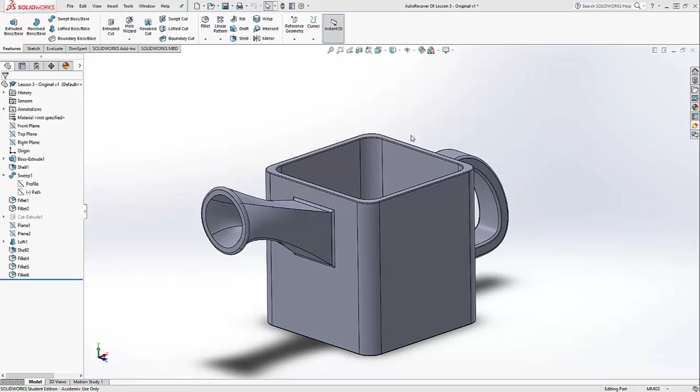Part two of lesson 3, advanced topics. So in the last part, we left off here with our watering can.

Yes, thank you for reminding me that it has not been saved in 20 minutes. We good? Did I save it?

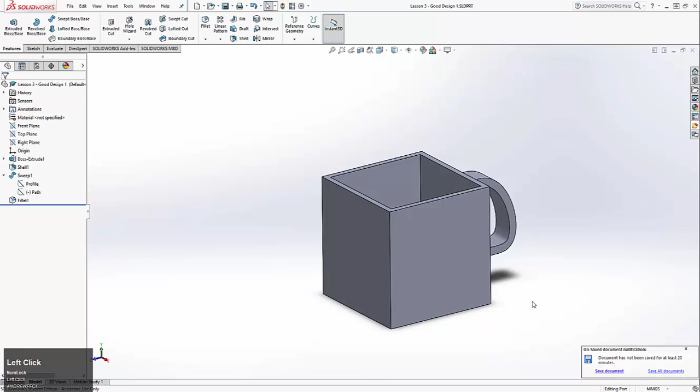Okay, I saved it. So we made our extrude and our shell, and then we made our sweep for the handle. And then in this part, we're going to create the spout and then add some fillets to make it look nice.

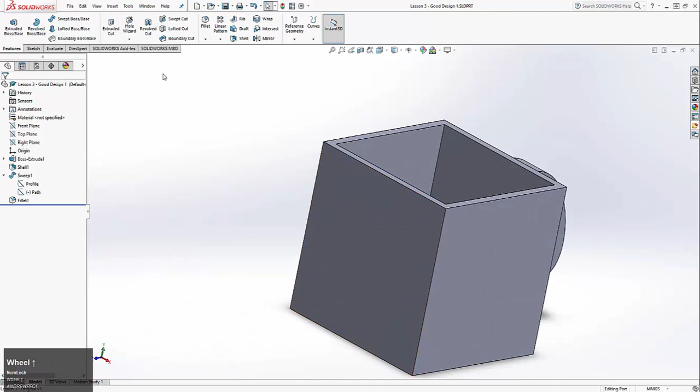So the first thing we need to do is actually we're going to put a hole right there. That's where the water is going to come out. So let's do an extrude cut on this face. Control 8 to center. Get our center rectangle. And just draw a rough square. And we'll set the size to 30 each.

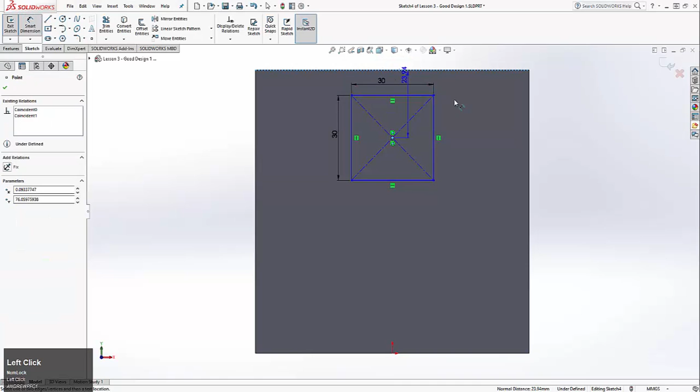We'll say that the center here is 30 from the top. And we'll say that the center is vertically aligned. Okay. So there we go. So it's cutting through. And this is a good example of when you would want to use blind, up to next, or up to surface. And I'll show you why.

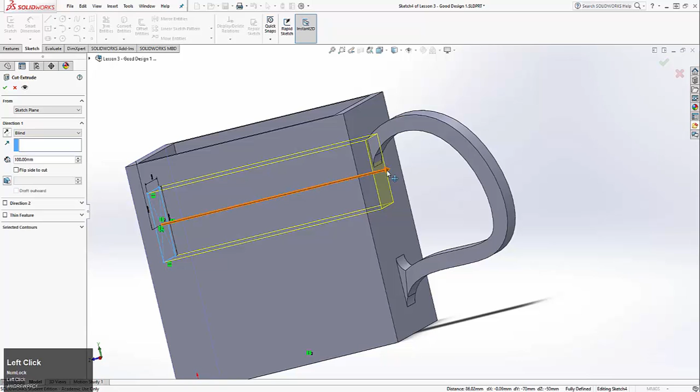So right now, with blind at 100, it's cutting through the entire flower pot. Watering can. It's a watering can. And it's starting to actually cut through the handle, which we don't want to happen. So maybe we just want this to be 5, so that could work. And then it would only go through the wall.

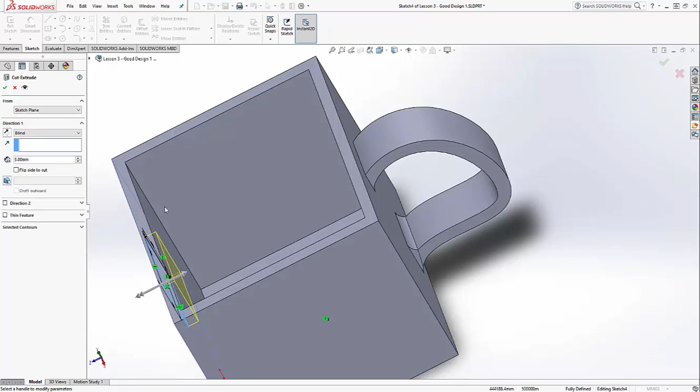But if the thickness of the wall changed, excuse me for the yawn, or maybe the wall wasn't so even, you could do either up to surface and choose the surface, or probably, I don't want to say the best because there is no best, you could do up to next.

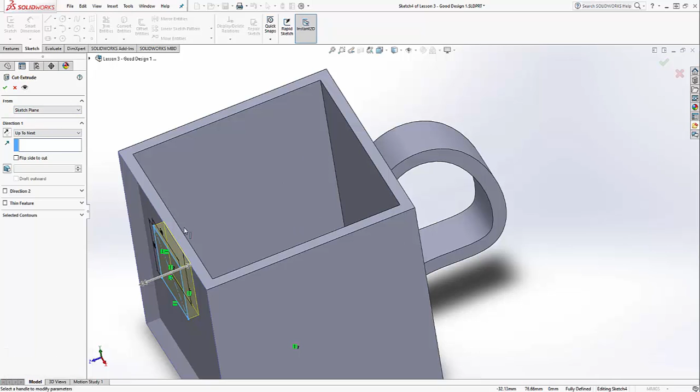So if you remember what through all does, where it goes through everything, up to next is essentially like through all, so it's going to go through all of this surface until it encounters another something, and then it's just not going to cut through that. So then you don't have to worry about how thick it is or anything about the surfaces. So I'm going to do up to next, and there's that.

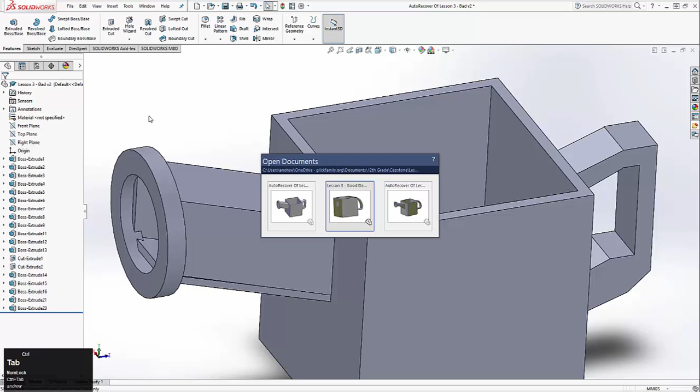So now, if we come back to our bad flower pot, which I think is this one, yes. So we had our cutout right here, and we extruded on the side, and then on this side, and then the top, and it was just very ugly. It was bad. So instead of doing that, we're going to be using the Loft tool. Where is it? There it is. Lofted boss/base right there.

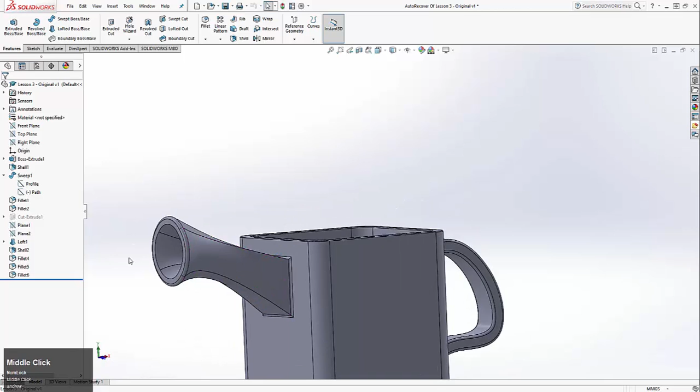Okay. And the way the Loft tool works is it takes a bunch of sketches in a tower sort of, and then it will turn those sketches into an object. So something like the spout right here. So first we need to make the sketches, and what we can do is we can go to features and then do the reference geometry, and we can make more planes. So just like we have our front, top, and right planes, we can make new ones.

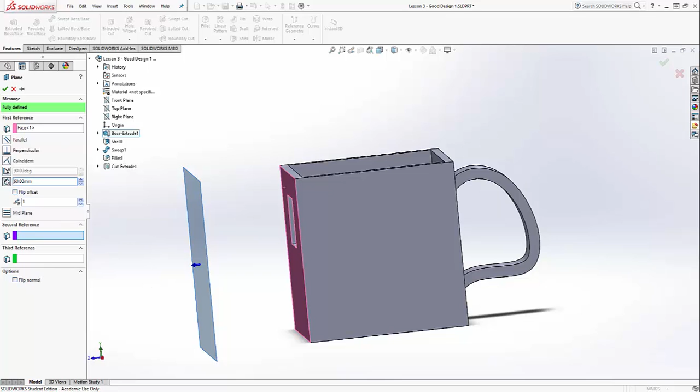So our reference for these new planes is going to be this front face, and we want this first one to be 60 away. So that's a reference. We can say parallel, perpendicular, and you can define them in a variety of ways. So say you could have a point or another object right here. You could have the plane project up to that, and so on. You could have angular offsets, but right now we just want the distance. And then we want another plane, this time 80.

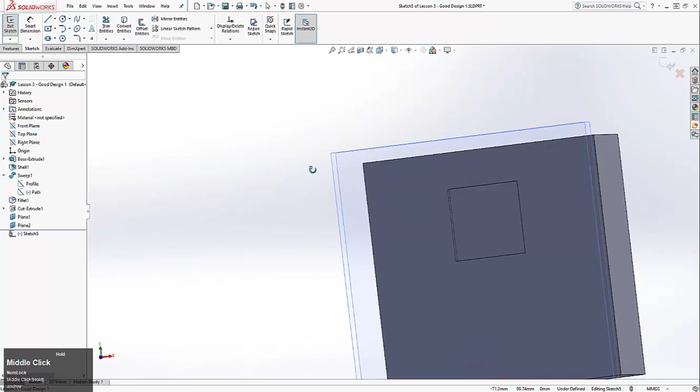Okay, so we have our planes, and now we're going to make our sketches. So I'm coming over to sketch, choose this surface. I'm going to do Control 8, and I want this square. So a couple ways you could do that is you could come over here and show the sketch, and whether or not you show the sketch from the extrude doesn't really matter. Actually, it does for what we're going to do. So for the sake of this, I'm not going to show the sketch.

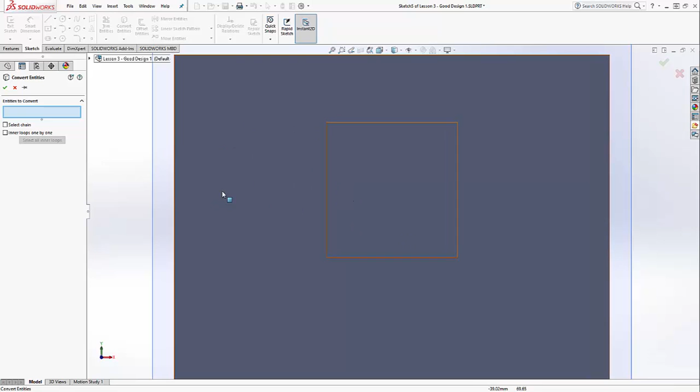So I'm going to come over here to convert entities, and this is essentially going to take things in your model and put them into your sketch. So I'm going to click on these lines right here, not the face. There we go. So now these 4 lines are in the sketch.

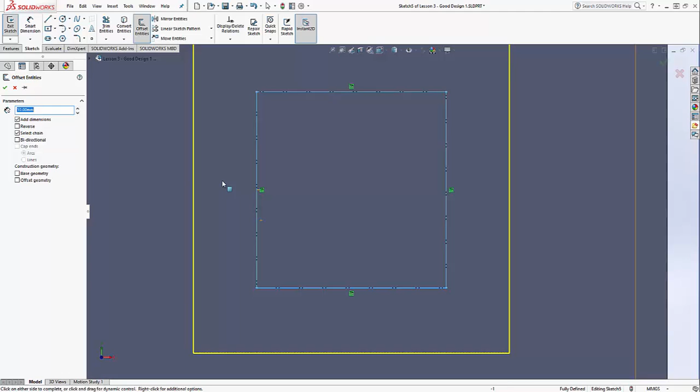I don't actually want these 4 lines because I want our sketch to have a little bit of an offset to it. So I'm going to do for construction. So I selected all of those, said that they were for construction, and then I'm going to come to offset entities, and it's going to offset them relatively simply. And I'm going to say that this is going to be 2.5 thick, and there we go. And exit sketch, and there's our first sketch done. Now for the second sketch on plane 1. Of course, you can rename them.

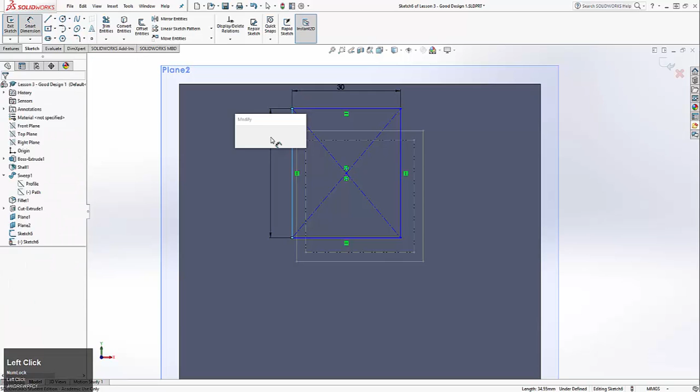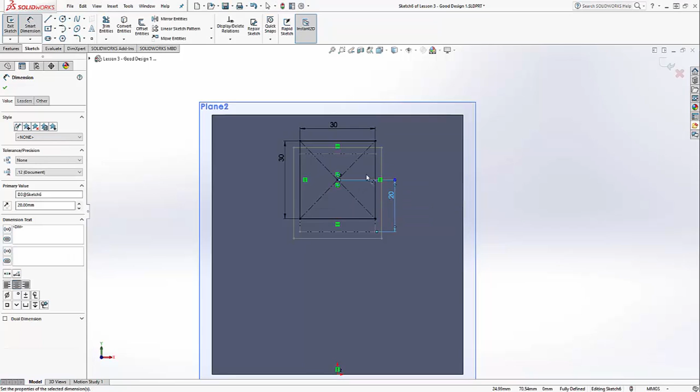So I want this one to be a square, like so. Let's say 30 and 30. So it'll come down a little bit. And then we want this to be aligned, once again, with the origin. So they are vertically aligned. And then let's say that this one has come up from the bottom. 20 seems good. Sure, let's go with 20. And there's our second sketch.

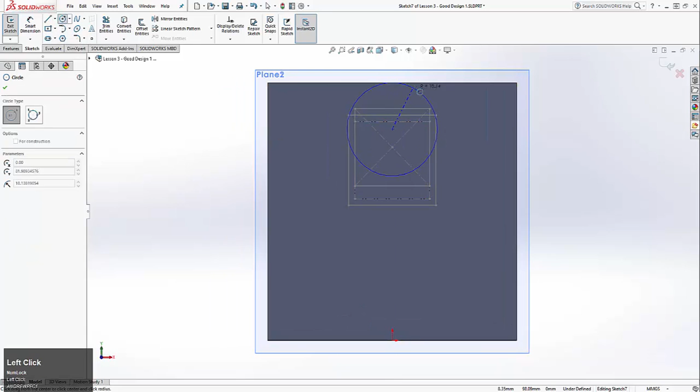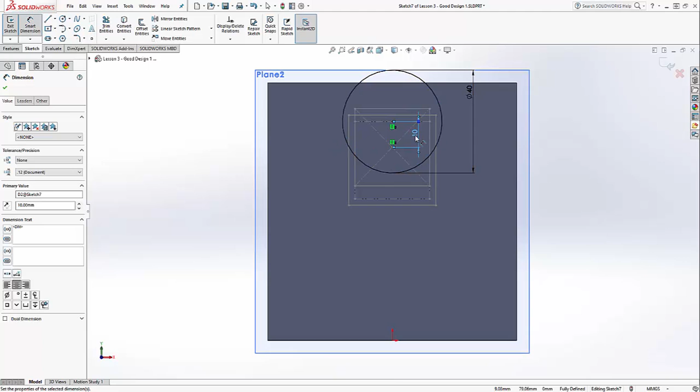And finally our third sketch. And by the way, you can scroll to go along this. I've been doing that a lot. I don't think I've mentioned it by name. Take a circle. You shall be 40 millimeters in diameter. It shall be vertically aligned with that point, and it shall be a distance of 7.5. How about 10? Too much? Let's do 5. I think 5 is a little bit better. And there is our third sketch done.

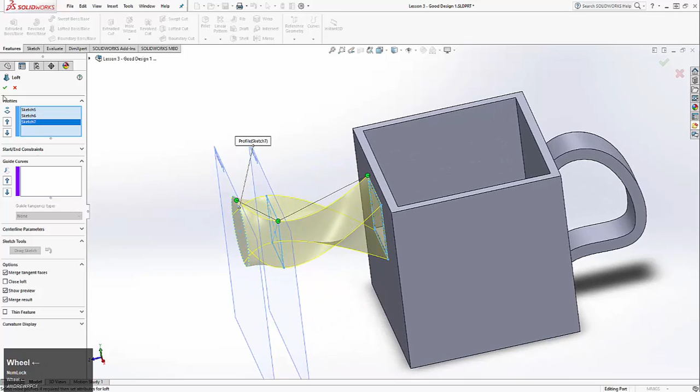Okay, so now it's time for the loft. Now it's going to ask us for our profiles. So we can say this one, and then this one, and then this one. And what is this mess? I'm going to just click the check mark so you can better see it. That is an interesting spout. It's quite a twist. It's very twisty. Yeah. I did intentionally do that, just so you could see.

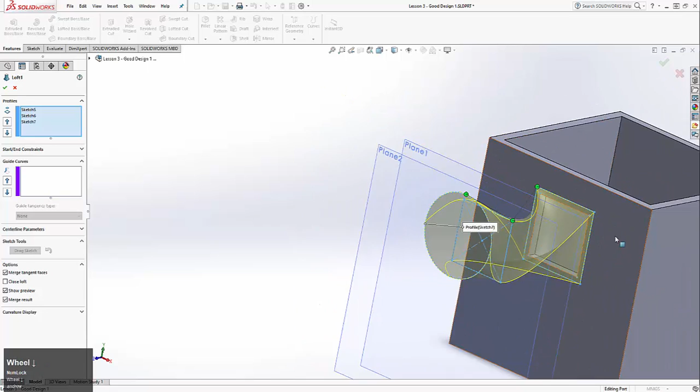Because when the loft is being created, it has to figure out which points to match to where. So if you have a square here, and you aren't limited to just squares and circles, you can have any shape, doesn't even have to be a regular polygon, it's going to try and say, well, this vertex here at this green dot is going to try and go to this vertex here at the green dot, and it's going to figure out the rest. So we can just move that over there, and that's better. Or alternatively, you could move this over here, and that's better.

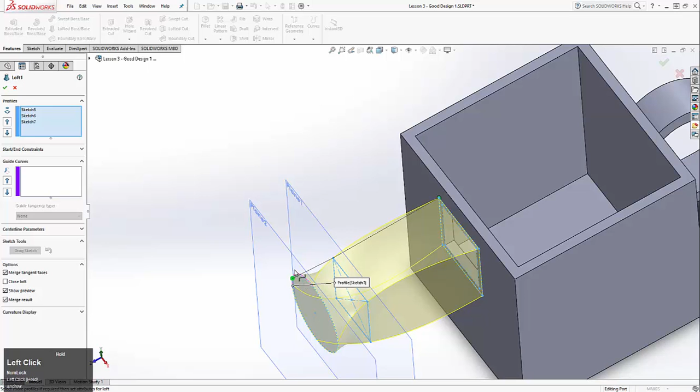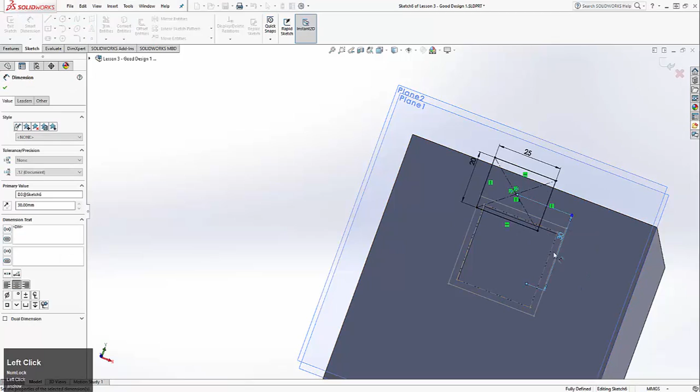Yeah, and then there's still a little bit of a twist because that's not quite right there. So there we go. You can adjust that a little bit. Or you can make your middle sketch, like in the original one, I did a circle for the middle one. And actually I want to edit the middle one because I don't like it completely. Let's call you 20 instead. Let's do 25 instead. And this will come up 30, because why not? Let's see how that looks. There we go, that looks pretty good.

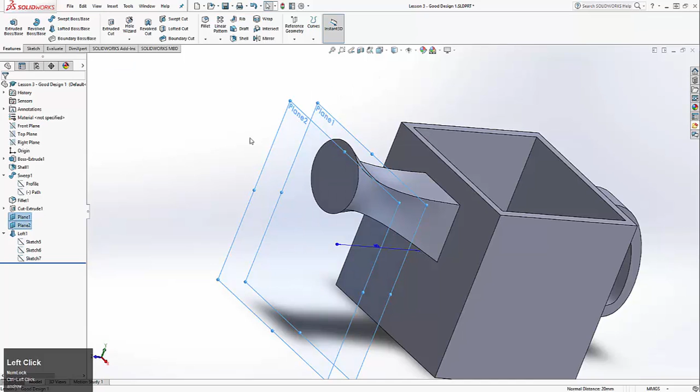Oh yes, now we have to put a hole in it. So we have a hole back here, but it's not going to follow the loft. So we can use our shell again, but first we're going to be done with these planes, so I'm just going to control select both of those and right click and hide, because I don't need to see them anymore. So let's do a shell here and here. Is that going to work? Nope. Thickness value is greater than the minimum radius of curvature, which probably means that it worked, but it isn't happy because it had to get in close. So this is kind of weird too right here, because we have the two different sized holes.

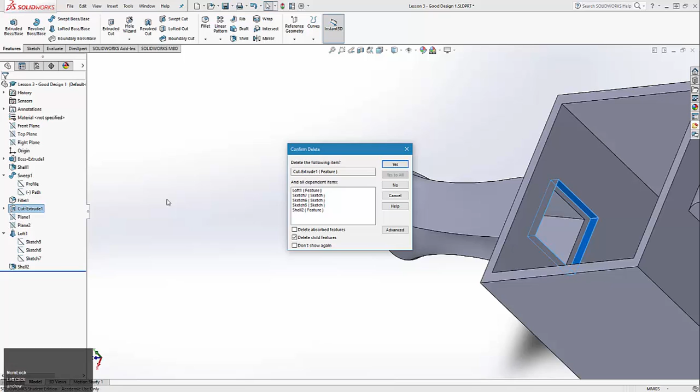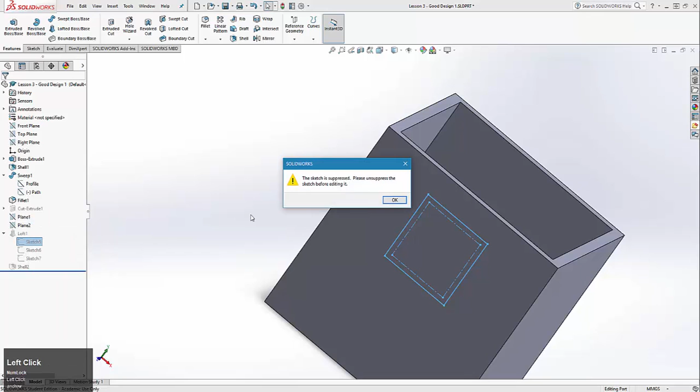So I'm just going to come back. I can't delete this because if I went here and deleted this, all of these features that we just made, which are dependent on that, would be deleted too. So we're just going to suppress it. And once again, they also disappeared because they were dependent. And the reason I showed this sketch, the first one that we made, so if you come over to edit sketch, yeah. Okay, I think it's going to make us unsuppress that first. So right click, unsuppress, edit the sketch. Okay. I'm just gonna delete the whole thing.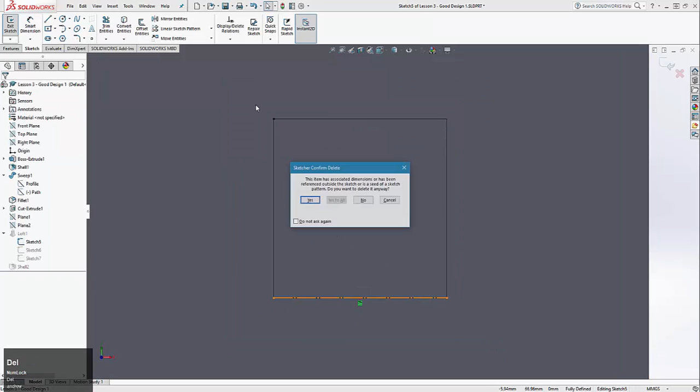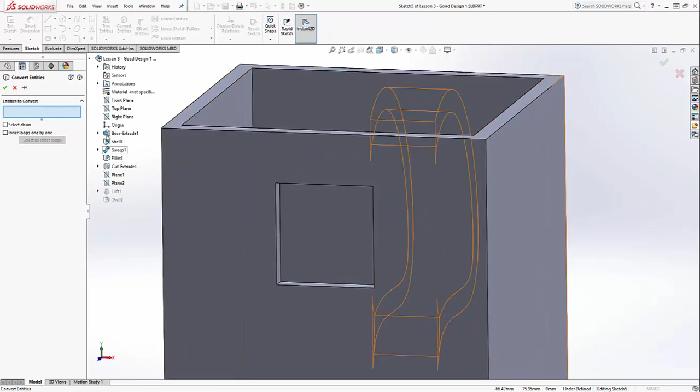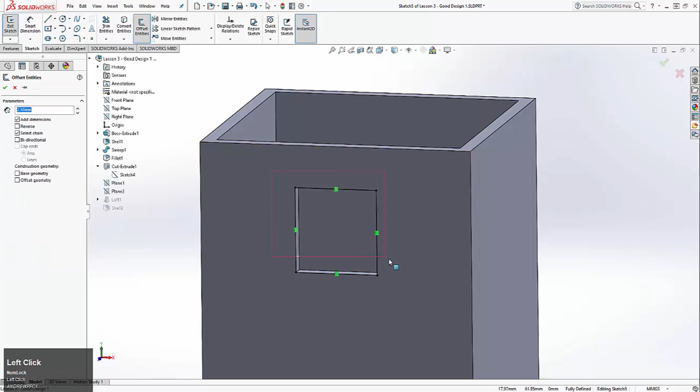When we did the, yes, fine, sure. Convert entities, we did it with the cut extrude right here. But when we got rid of the cut extrude, the lines weren't there, so it couldn't reference them. And that's just another way you can sort of see how SolidWorks works in this tree structure. So it creates this feature and then so on and so on. So if this feature doesn't exist, and this feature takes something from it, then this feature can't exist. I think it was maybe a little bit complicated the way I said that, but I can just select this sketch and click the check mark, and then it'll project that sketch. No problem. Offset entities, I'll take all of those. Once again, 2.5. And we need to take the middle ones for construction.

So now I'm going to come back and unsuppress all of this. Unsuppress, just continue, ignore error, blah, blah, blah. I don't care. I'll get to that in just a moment.

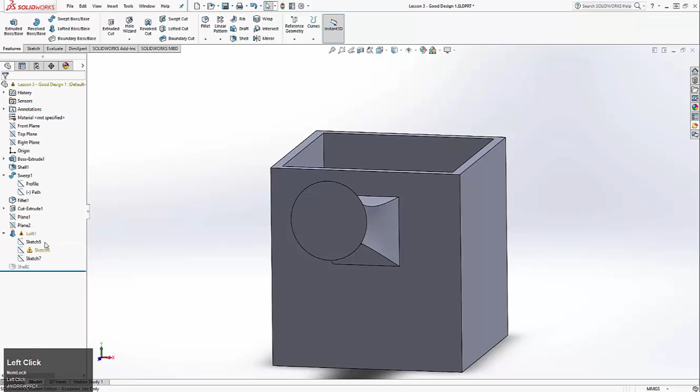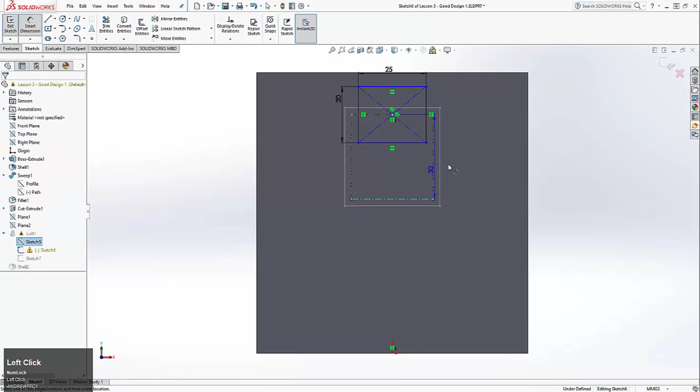What's wrong with this one? Okay, so it doesn't like that I have, so this is turned like a dark yellow. It's because there's an undefined relation. So it knows that there was something here, but it's gone now because we just deleted it. So I'm going to delete that and then redefine it. So click center and right there and 30 once again. And we should be good after that. There we go. No problem.

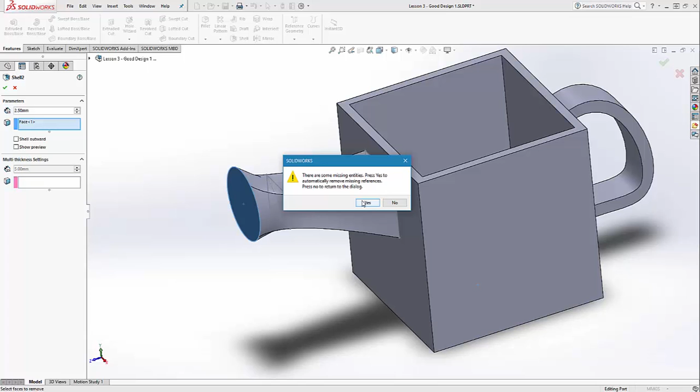So now if we suppress this, there is no issue. Now if we come to the shell, edit feature, and maybe make this a little bit thinner, so like 2.5 like we originally had. Some missing entities, press yes to remove missing references. So I'm just going to say yes, and I think it's going to fix it. No? Oh, I forgot to unsuppress it. Whoops, there we go. Ta-da, it did, oh, didn't go through. This is the design process right here.

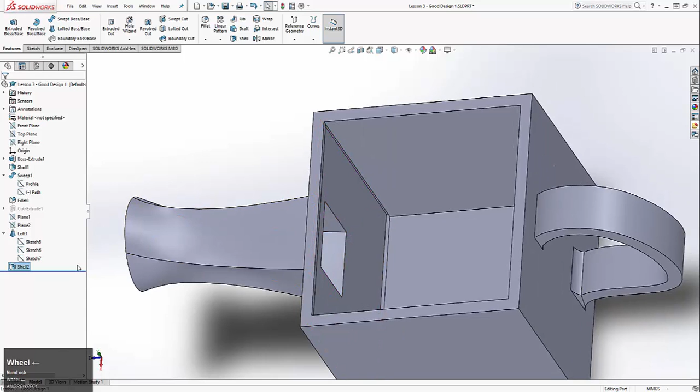So let's choose that face as well. And, well, I don't think that happened in the original. Hold on. Okay, I figured it out. I sort of cheated the system when I did it the first time. When I came into this shell value, I made it 5, which was the same thickness as the wall, so it couldn't make a shell. Essentially, yes, it's going to automatically do that, whatever. I also came in and changed this sketch to have 25 tall, if you want to keep up with that.

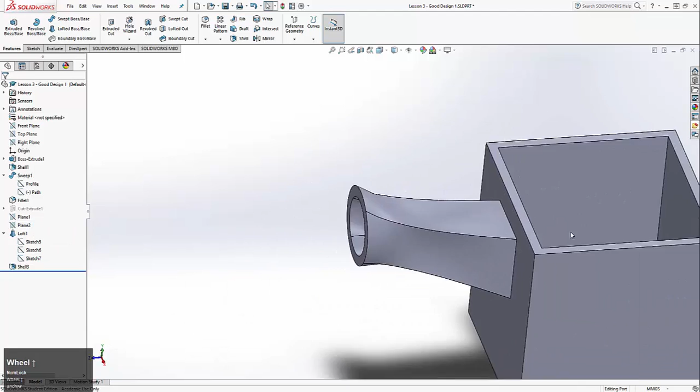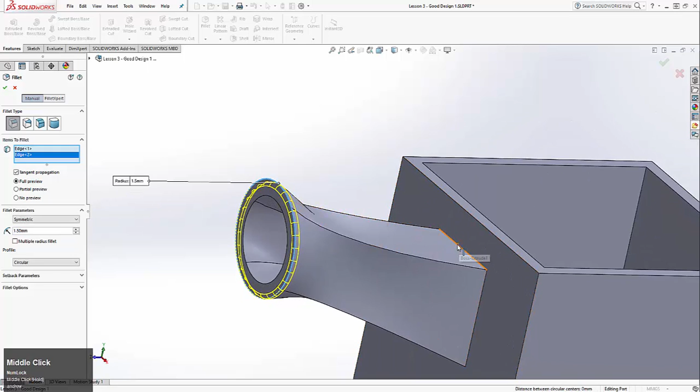So now the basics are pretty much done. We're just going to add some fillets to make it look a little bit nicer. So we can start off by taking this edge right here, and so on. We can make this not 10. Let's do 2.5. Let's see how that works. That's much. 1.5. How's that? That looks good. Let's do 1.5 on this one as well. There we go.

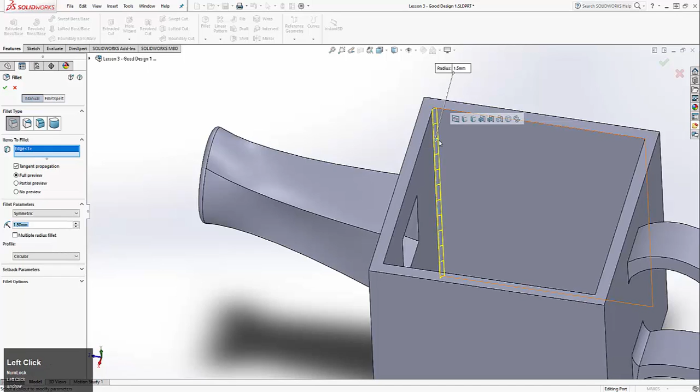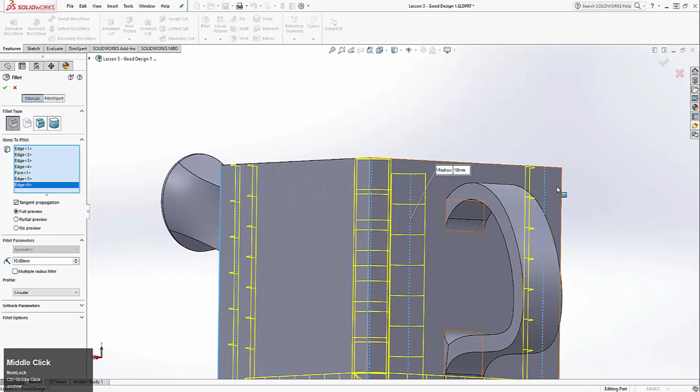What else? Okay. We can also do these big corners right here because those are sharp. So let's try 10. We'll actually use 10 for once. Isn't that funny? We can select these edges, and then we should also be able to select this face, and it'll do all of the ones on the face. Then we select these outside edges too. But don't worry about the ones in the bottom. We'll get to those in just a minute. So there we go. That looks much better.

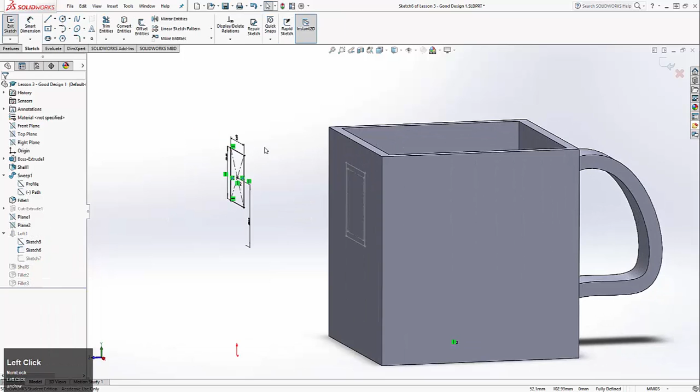This bit looks a little weird still. I'm actually going to shrink this back down to, you know what? I can change this plane's definition, and let's call that 50. See if I push that back a little bit, what'll happen. That's better. Kinda. It's still a little twisted. Like I said, in the original model, instead of doing a square here, I did a circle, but I thought I'd showcase the twisty feature. So in case you encountered that, you would know what was going on.

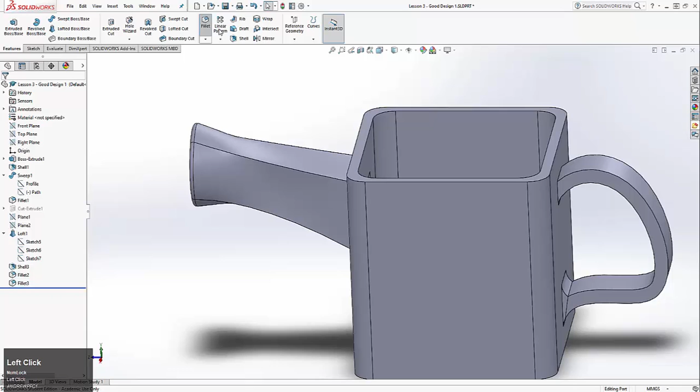Let's do another fillet over here. Not 10. Once again, let's try 1. Is that gonna work? There we go. Sometimes you have to make sure you have all of the edges selected.

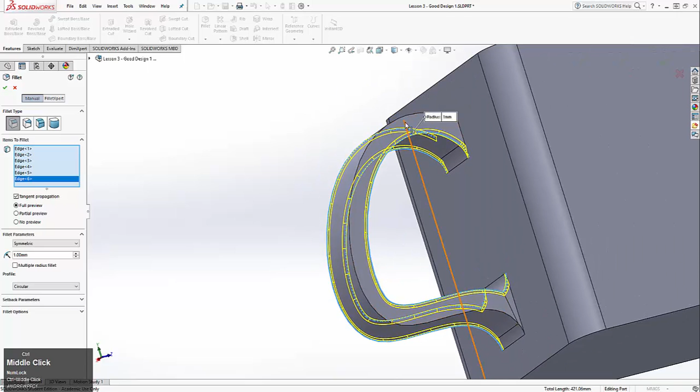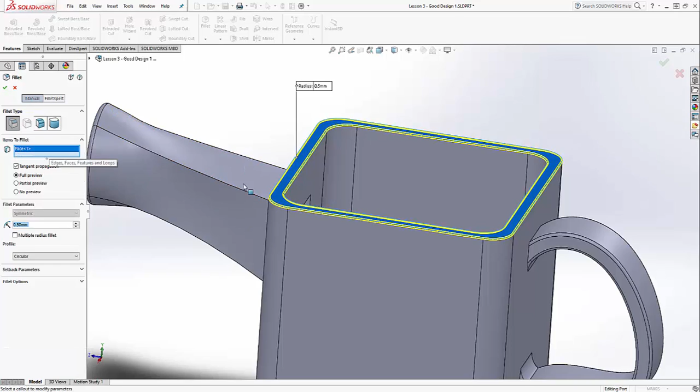Then one final thing for all of the edges that we haven't touched yet. I'm just going to do another 0.5 fillet. Actually, that may be too small. Actually, yeah, that's fine. So there, all the edges down here on this face. We can do this inner loop. Why not here as well? We can do these side ones.

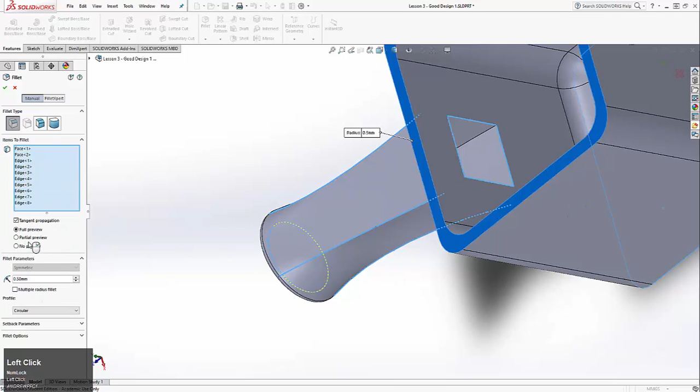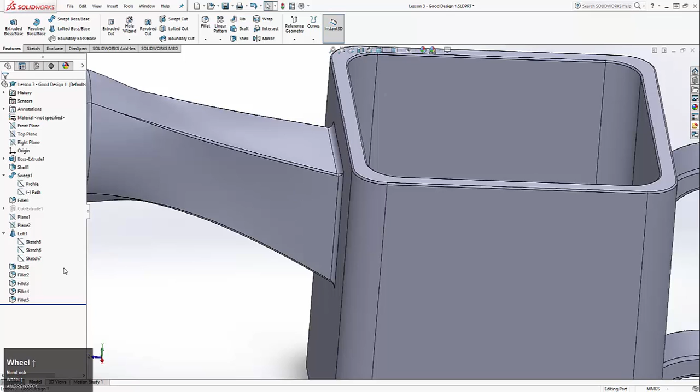And this is, once again, when you may want to have partial preview, or depending on your needs, skip some of the fillets. Like here is probably not super necessary. There we go. Let's see how that comes out. There we go. 0.5 might have been a little bit not enough. So I'll change this up to 0.75. How does that look? There we go. I think I can live with that. So here's our strange looking, not flower pot, but watering can.

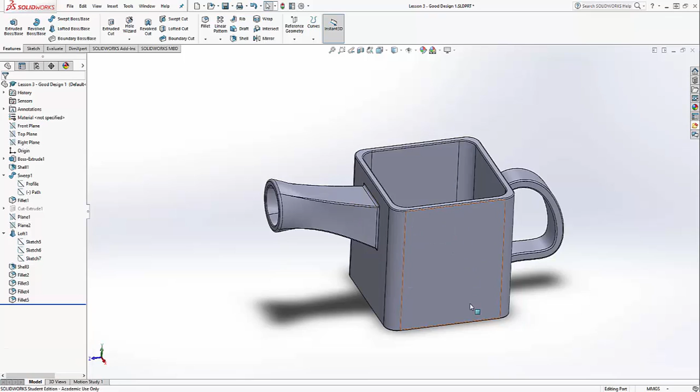Thank you for watching part 2 of lesson 3. And in the next part, we will take this and then use some patterns and text to make it a little bit fancier. Farewell, I will see you then.